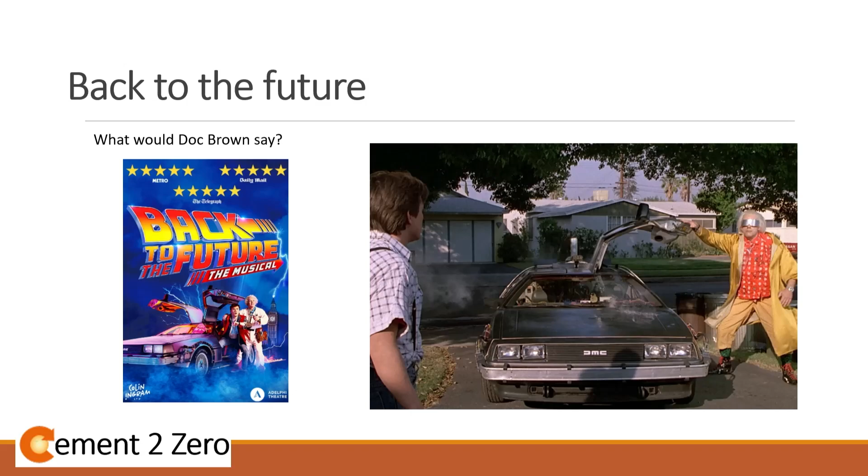So, what do we mean when we look at the future? I always like to show, in trade industry press, magazines and things, these really futuristic representations of what the roads of the future, the streets of the future, are going to look like — all about automated cars, everything being connected, that kind of thing. What we don't focus on so much is actually how we're going to build it, how much it's going to cost, where the materials are going to come from, how we're going to do it sustainably. We're starting to have those conversations now, which is great.

But we do have a big challenge ahead. If you think about 2050 — I know Paul mentioned 2045 earlier as Skanska's target — but generally if you think about 2050, it's just over 26 years away. 26 years isn't a long time, it's a generation. If you look back 26 years from now, that's 1997. Quite a relatable year, actually.

I think it was Rachel who talked about the Kyoto Protocol — that was 1997. We had the first computer beating Garry Kasparov at chess. We had the first Harry Potter book. We had Dolly the sheep. Quite a pivotal year, actually, when you think about it. But it's not that far away, so we've got a lot of work to do.

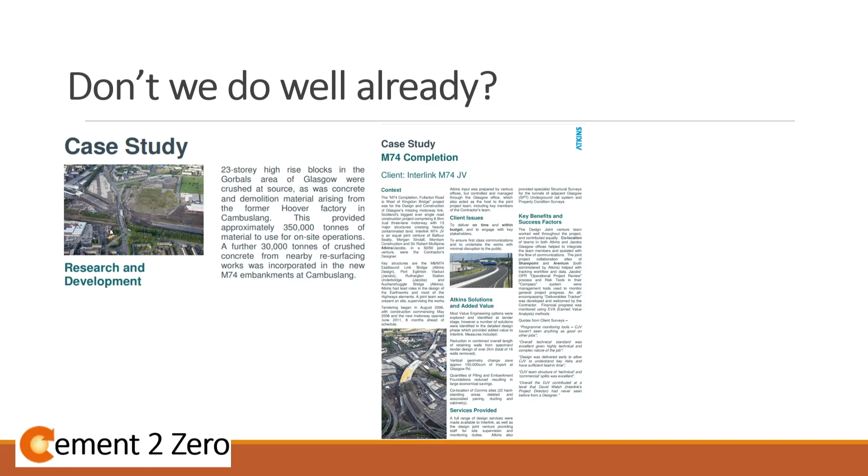So there's that project. There's also Network Rail, who have got a recycling and reuse facility down in Whitemoor in Cambridgeshire. They've had that for about 10 years or so. But again, a lot of the demolition waste gets reused, but maybe not recognising the value that it has.

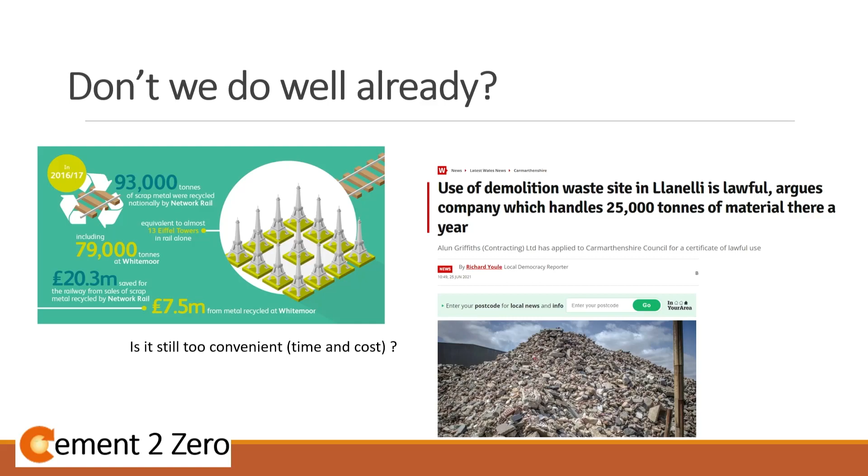So what solutions are there for cement and concrete? I'm going to hand over to Pippa now, who's going to help define what the problem is.

Really nice to be here. I'm from a research group at the University of Cambridge, which focuses on what does an industrial strategy look like with absolutely no emissions - no negative, no offsetting, not just a little bit of emissions left over, completely zero emissions. And when you think of industrial strategy, obviously concrete and cement's a big part of that.

And as you said in your introduction, thinking of a world without Portland cement is really challenging. So when our principal investigator on this project posed that question to our group and said, what would a world look like without Portland cement? We couldn't imagine it. We couldn't imagine living in a world that doesn't have Portland cement. And there's different challenges to thinking about that world.

So the first one that we look at is recycling. And as Mark's mentioned, and there's been lots of commentary so far today, the construction sector is actually quite good at recycling and has been for a long time. We don't really have waste - it's just a different feedstock that we're moving around. But the challenge of having zero emissions is we can't recycle to a lower feedstock. We can't downcycle, because if we downcycle, then we have to keep producing virgin material, and that generates emissions.

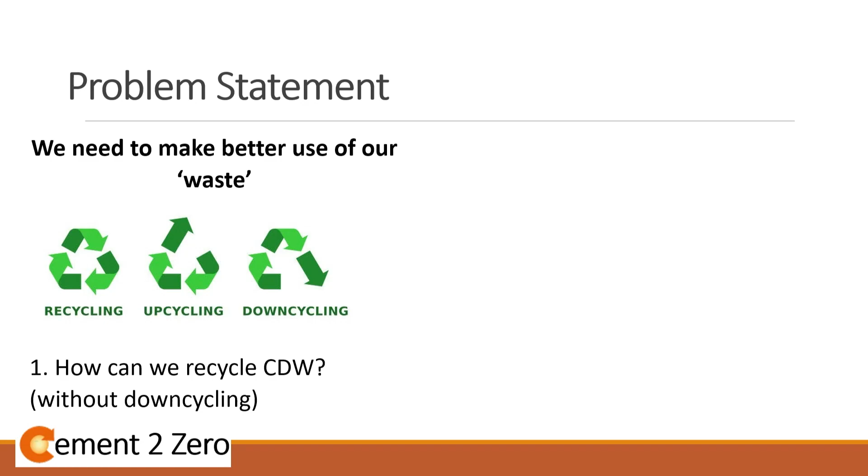So when we need to think about recycling with absolutely no emissions, it has to be upcycling. So we need to go from clean aggregate to concrete back to clean aggregate, or Portland cement to concrete back to Portland cement. And that would enable zero emissions production. So that's one side - how do we do that? That's one question, one problem we've been trying to solve.

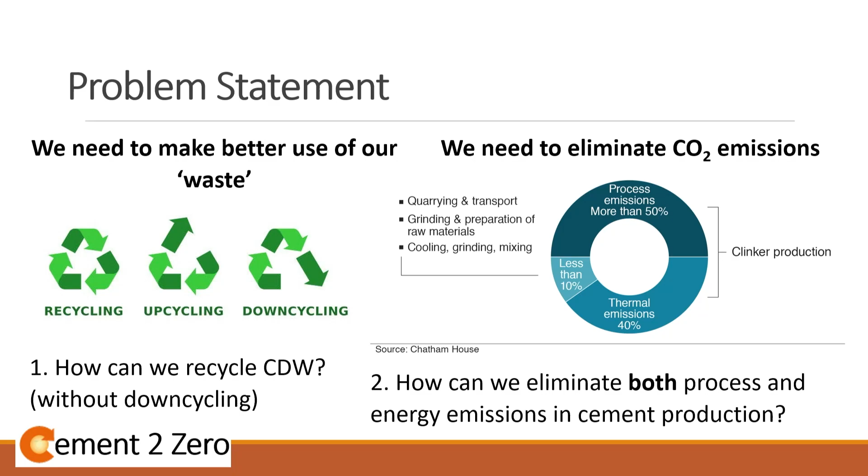The next problem we've been trying to solve - and I don't have to tell you this graph because you've heard it loads of times already this morning - is where the emissions come from. Cement's double trouble: you get emissions from the chemistry and the process that's happening, and you also get it from the fact that you need heat, and to produce high temperatures, it usually has emissions and fossil fuels involved. So we were looking at both sides of those - how do we convert production so you don't have any emissions at all, both for heat and the chemistry? And then how do you create a process that you can repeat again and again and again, without losing the value of the materials that you're using?

And the invention that Cyril Dunant, one of the researchers in our group, came up with in response to this, we've called Cambridge electric cement. It's electric cement because it's produced in an electric kiln.

The process we work through is we take demolition waste and process it to separate out all of the components. What we're left with, and the bit we want, is what we call the recovered cement paste. The byproduct from our process is a really clean aggregate that should be as good quality as new aggregate, so there's extra benefits in that.

We take the cement paste out. I'm going to explain it, though my description won't be that great. There's a really nice video on YouTube with some graphics - it's a bit long, but feel free to watch it. Hopefully this will make sense.

So we take the recovered cement paste, and that eliminates our process emissions because the material has already released the carbon dioxide the first time it was produced. As long as it hasn't had too much recarbonation in service, it shouldn't release more carbon dioxide when you re-clinker it to use it again.

So the next challenge is how do we re-clinker, how do we provide that heat? We looked at an electric way of providing that heat so you can decarbonise the electricity grid, which enables you to produce it without emissions. We already have a high temperature electric process in our sector - steel recycling's electric arc furnace.

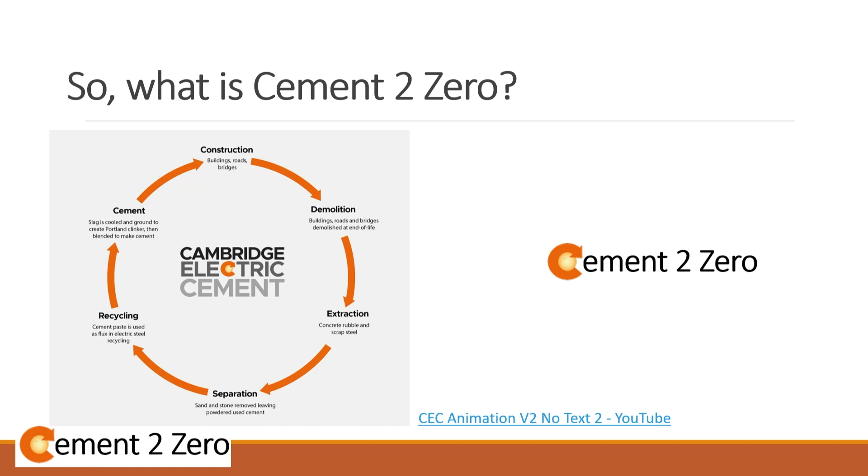That's where Cement 2 Zero comes in. It's an Innovate UK project, and when we started, we'd made about 10 grams of this cement. Hopefully at the end we'll have made 20 tonnes. That's the kind of transition - I know it's small for you, but for us at the university, 20 tonnes is really big.

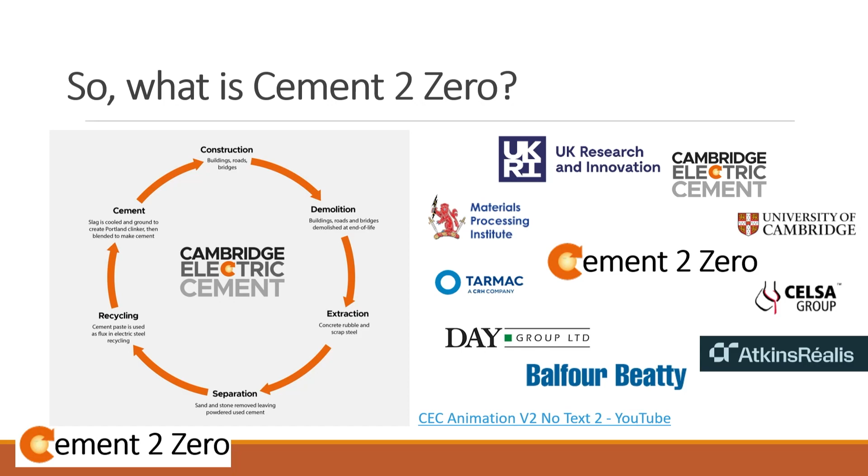So here's a short video that takes you through where we're up to so far.

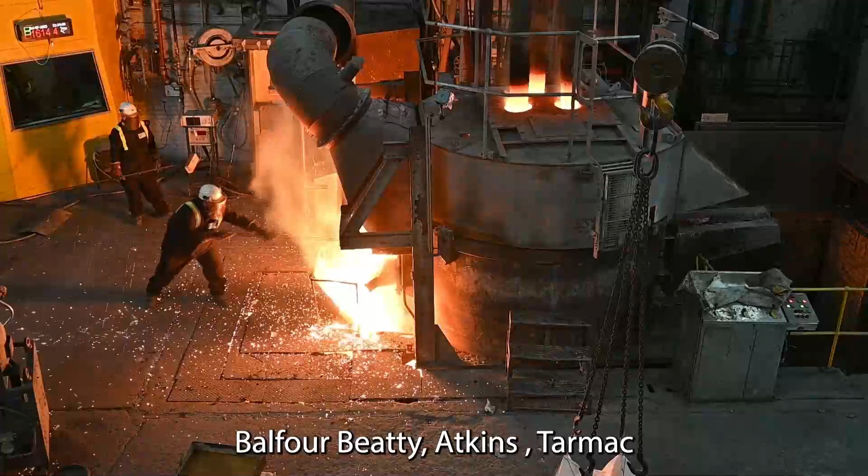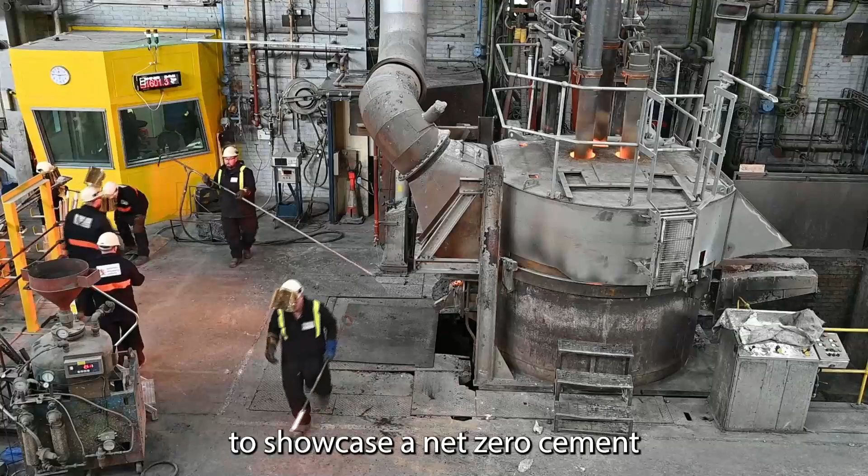Cement 2 Zero is a £6.5 million Innovate UK grant-funded project, led by the Materials Processing Institute, supported by University of Cambridge, Balfour Beatty, Atkins, Tarmac, Celsa and Day Aggregates. It provides an excellent opportunity to showcase a net zero cement, which will be incredibly positive for the UK.

At the university we're looking at the fundamental science behind this Cambridge electric cement process, and we're trying to work out how you can make zero emission cement in an electric arc furnace.

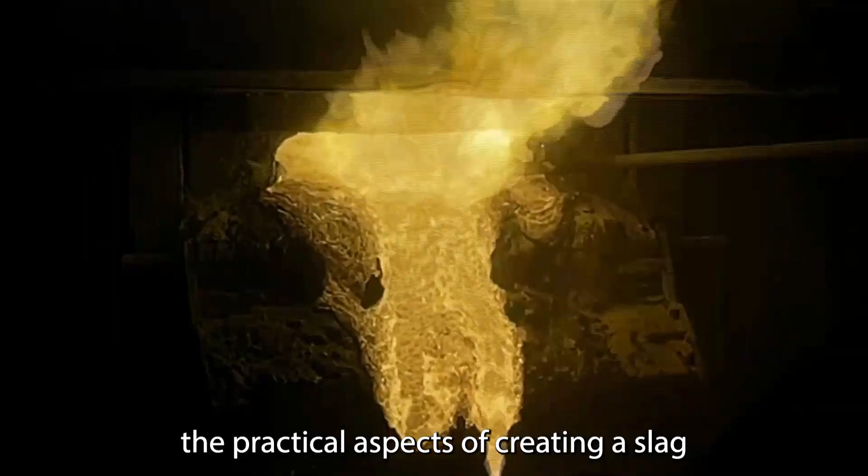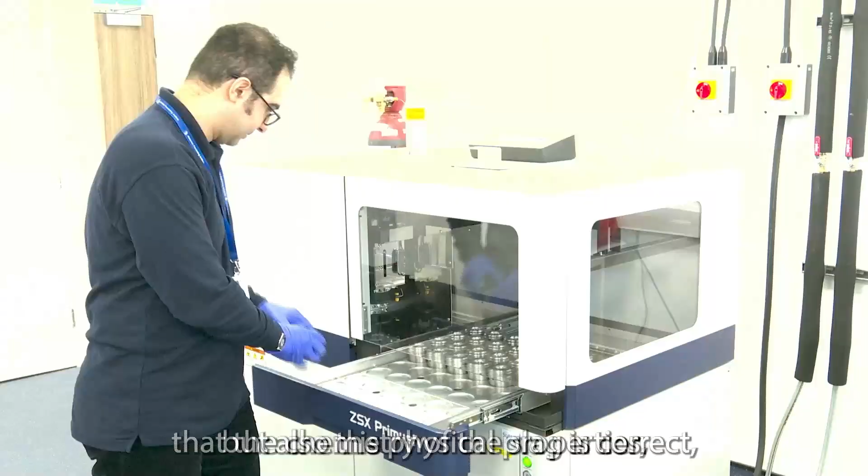Today is part of the important steps of the project to understand where the science meets the practical aspects of creating a slag that ultimately can be upscaled to a large electric arc furnace operation. We're principally interested in knowing that the chemistry of the slag is correct, but also the physical properties, the physical characteristics and the behaviour of the slag inside an electric arc furnace.

It's very important to make sure that all of the criteria is satisfied and that we've completely de-risked the slag technology and the way that it performs in this small arc furnace, in this test environment, before we can move up to a large-scale operation.

With the Cement 2 Zero project, it's really helpful that we can test what we're doing in the lab and a small-scale environment in a much bigger pilot-scale environment. So if we're successful today, this will be the first time that we've made cement in an electric arc furnace, which is really exciting for us.

The key statement there was if we are successful today, and we weren't actually successful on that day, but if we are successful soon, hopefully we'll get there. So the trials at the moment are really promising.

We've managed to prove out that making cement clinker in an electric arc furnace doesn't damage the furnace and doesn't negatively affect steel production. That's really important for us to be able to move to the next step, which is going from these pilot scale melts into the full scale trials, where we'll do that at the full scale electric arc furnace in Celsa's site in Cardiff.

Once we've produced, hopefully, enough of the slag, which is cooled and ground to be clinker and processed, we're working with Tarmac, Balfour Beatty and Atkins to try and use that in an on-site application. It was interesting hearing some of the talks this morning about the challenges of needing to do it in temporary works and how we want to test it as much as possible in a real scenario, but obviously de-risking the process as well.

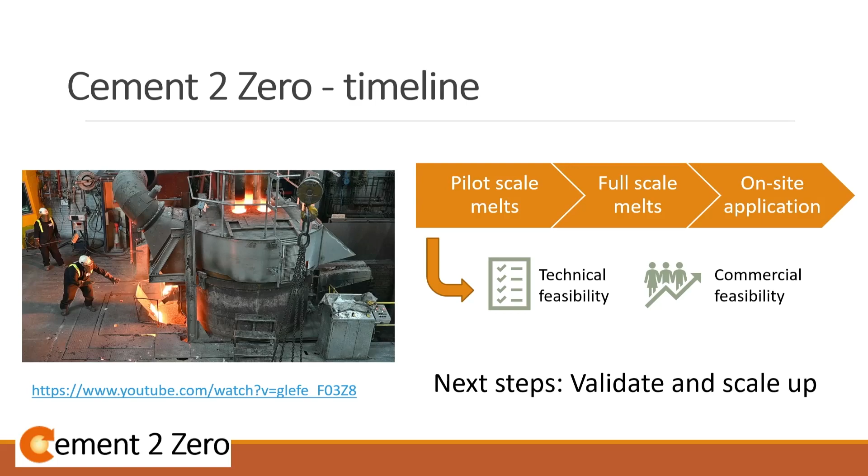So we're really excited about this. Obviously, you can't buy it yet. It's not available to use yet, and we've got quite a bit of time that we'll have to wait until we can actually make the most of some of these new innovations. But I'd like to think that we don't just need to sit around and wait for this new kind of technology to come through. There's lots that we can be doing so that when it is ready and when it is available, that we can use it most effectively.

The first one is around material efficiency. So whether it's our process, whether it's some of the other technologies that have been discussed, our assumption is that zero emission or really low emission cement isn't going to be available in really high quantities, really cheaply. Hopefully it will be, but it's unlikely.

So we can think ahead and see how can we value that material more - how can we deliver the same level of service but with less clinker, because that's where the emissions are. So thinking of opportunities for eliminating waste, prioritising material consumption. At the moment it might be that in order to reduce labour costs you increase your material consumption. Perhaps that dynamic will change if the cost of the materials is increasing.

And then thinking of the value of waste - if we have demolition waste and it's crushed and it's mixed, how do we do additional processing in order to increase the value of that product so that, instead of having a waste, we have a feedstock? And at what point is that economically viable? They're all questions that we can start to think about now.

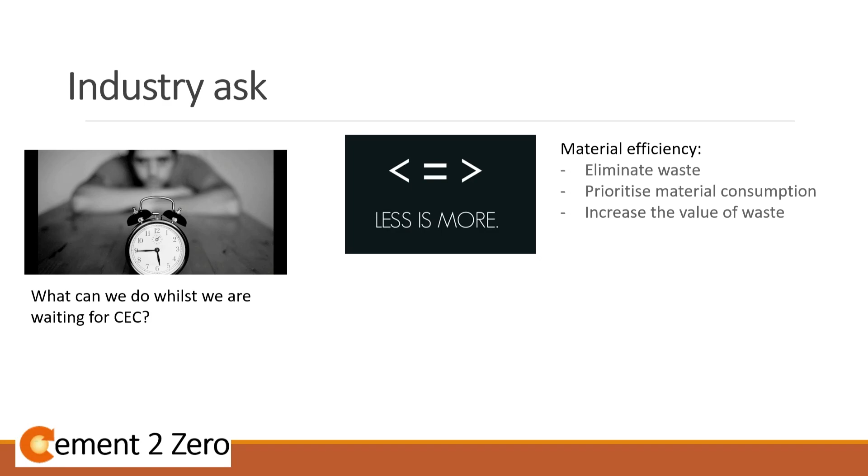The next one is on the innovation side - the desirability, I don't know if you're familiar with this, it's the kind of three circles of innovation. So for innovation to succeed, you need to want it, it needs to be possible, and it also has to be able to make you money.

At the moment for our Cambridge Electric Cement product, we think there's a demand for it, but actually some of the metrics don't always line up when you look at Scope 2 and Scope 3 emissions. At the moment, there isn't a huge amount of incentive for steel makers to let us use their electric arc furnaces to make cement. So the system might desire it, but does each individual person in the supply chain benefit, and are the motivations in place for it?

We're working on the technical feasibility. There's a long journey to go on that, and I think it would be brilliant as we look forward to increase collaboration, do as many tests as possible, and to validate these materials. The same with some of the other innovations coming through. We need much closer collaboration between the university and industry trials, so that we can scale it up quicker.

The final one is looking at the business model. All of our research at the university is based on demand reduction, using less material as a way to reduce emissions. But we don't want that to also equal making less money and economic slowdown. So we need to think creatively about how we can disconnect the amount of materials being used from the service and benefit society is having, and the value we put on that service.

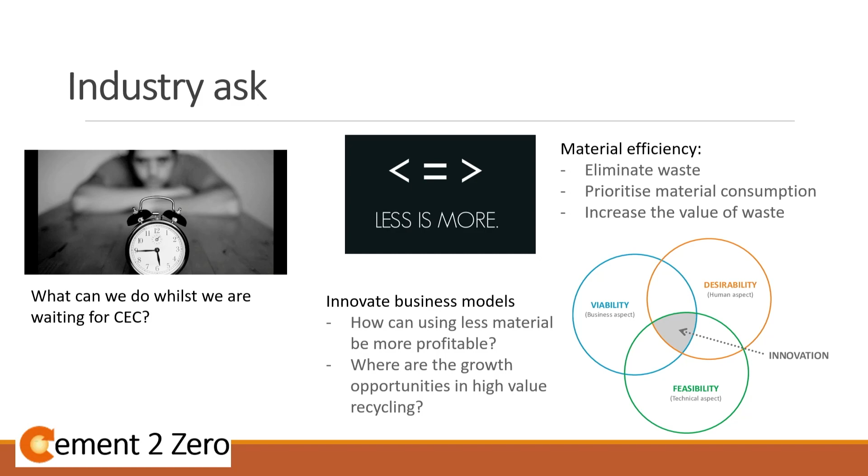High growth recycling opportunities we've touched on already. I'll pass it back to you, Mark.

I'm aware of time, so I'll probably skip over some of the last slides. But really, I think what Philippa's shown and what the work around the Cement 2 Zero project has really shown is it's a mixture of things. So where could it go? It's about good design, about valuing resources, about understanding what assets we've got at the moment. We could be sitting on a huge feedstock of materials that could be potentially used or reused again.

The International Energy Agency has now got it on their roadmap as well. They're predicting a 93% share of near zero clinker production through what they call deep reductions, requiring a massive rollout of innovative technologies such as cements made with alternative raw materials and carbon capture and storage. So it's part of the mix.

A question that I had, and I still have in the project, is will there be enough material for the industry? The team at Cambridge have looked at this. They're very rough numbers at the moment, but they're thinking there's potentially enough material or stock to make about 25% of the cement demand in the UK at the moment. Limiting factors, as Pippa mentioned, are steel production and furnace availability and so on. It could go up maybe higher than that. If we're looking at material efficiencies, we could potentially save more. So yeah, a real mixture of things that we need to think about.

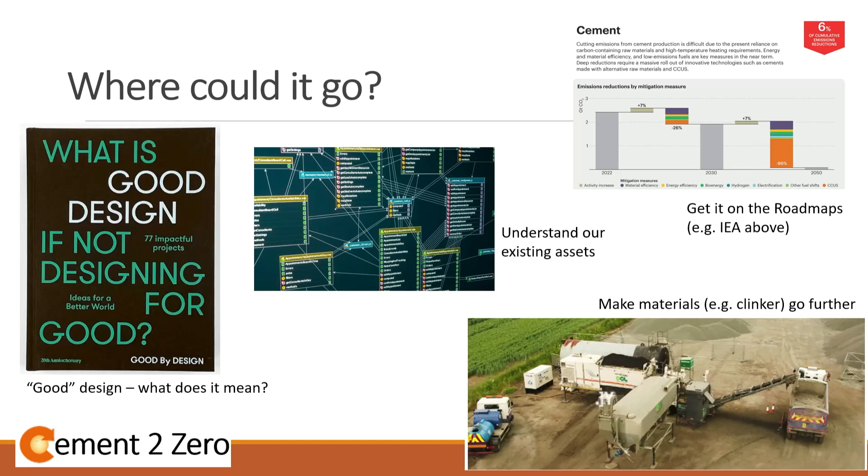Just want to touch on project successes so far. They're across kind of three main areas. Pippa said we're halfway through. We had our Q4 meeting a couple of weeks ago.

The first one, and I think we all agreed on this, is the teamwork and collaboration we've all experienced. Some of the project partners have worked before as companies, but as individuals we're kind of all getting to know each other, and the collaboration so far has been a real success, probably the main success so far. PAS 2080, the carbon management guidance, has been mentioned quite a few times this morning already, and one of the aspects of that is value chain collaboration, and this is value chain collaboration in action.

The second success, I would say, is that the Innovate UK structure really keeps you focused, keeps you on task, makes you report on time. It just helps when you're treating it like a project to deliver for a client.

And then lastly, commercialisation discussions I think have really been successful as well, and we're probably not even halfway through them at the moment in terms of what we need to think about, thinking about the system and how cement or the product can be manufactured. But yeah, good so far, halfway through it.